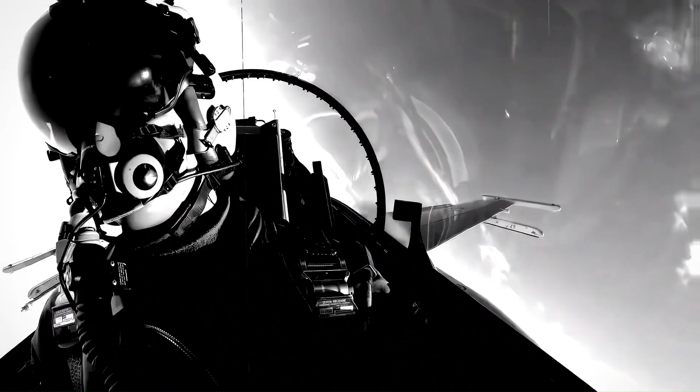The Lockheed F-16 Fighting Falcon. The F-16 was developed in the 1970s, during a period when CFD was becoming increasingly practical in aerospace design. As a result, the F-16 became one of the first fighter jets to significantly benefit from computational aerodynamic analysis.

Aerodynamics is the study of how air moves around objects, and for a fighter jet like the F-16, this directly affects factors such as lift, drag, stability, and maneuverability. Unlike commercial aircraft, which are designed to be naturally stable, the F-16 prioritizes, and I mean heavily prioritizes, agility.

This means they often fly at high angles of attack, where the aircraft's nose is pointed significantly above the direction of travel, as you could have seen in this image. At these angles, airflow can separate from the wing surface, leading to a loss of lift. The F-16 also operates near transonic speeds, where parts of the airflow locally exceed the speed of sound, forming shock waves that increase drag and reduce control effectiveness.

The effect of these shock waves can be said to be shocking. Sorry, I apologize. That was poor.

Designing an aircraft to perform well in these conditions required a deep understanding of complex airflow, an ideal application for CFD. I've said the term CFD a lot now, but what actually does CFD do? At its core, CFD predicts how fluids, such as air, move by solving the Navier-Stokes equations, a set of partial differential equations which express how the velocity, pressure, temperature, and density relate in a viscous moving fluid.

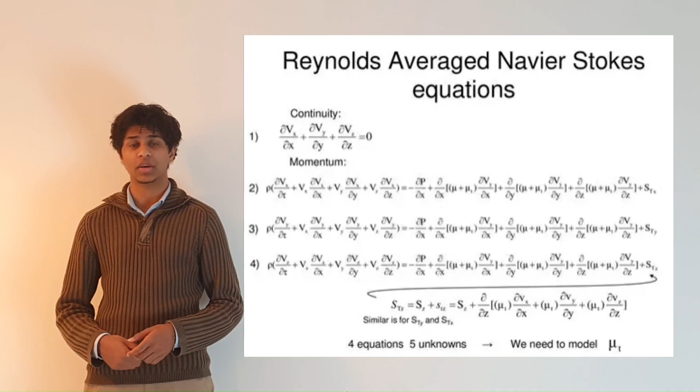So CFD usually solves the Reynolds-averaged Navier-Stokes equations, or RANS. RANS equations model the average effect of turbulence rather than every tiny fluctuation. To close these equations, turbulence models such as Spalart-Allmaras are used to estimate how turbulence affects the flow.

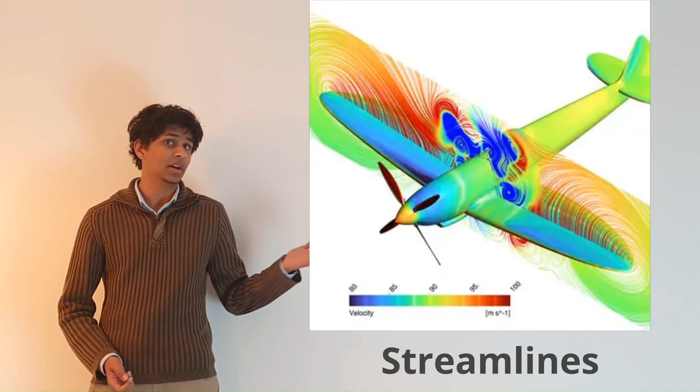Once the equations are set up for every cell, the computer solves them iteratively, repeatedly refining the solution over and over again until it converges. The final result provides detailed flow data for every cell, including pressure, velocity, and turbulence. These results are visualized using pressure contours, streamlines, and velocity maps, making complex airflow patterns easy to interpret. I say easy, but this still looks incredibly complex to me.

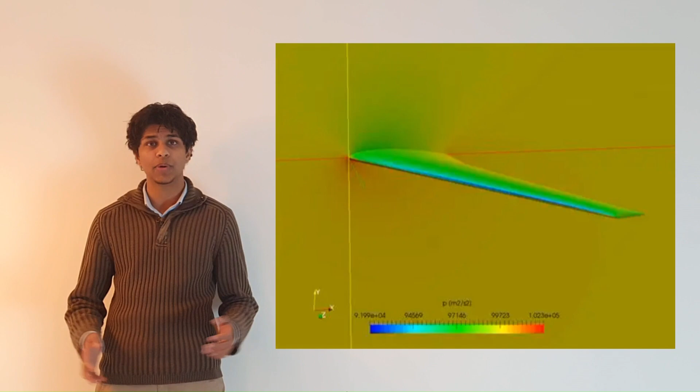One of the primary uses of CFD in the F-16's design was analyzing pressure distribution across the wings. CFD simulations allowed engineers to see exactly where low pressure regions formed on the upper wing surface, which are responsible for generating lift. By adjusting the wing geometry and leading edge shape in their designs, engineers were able to settle on a design which had strong lift even at high angles of attack. This directly improved the aircraft's turning performance and combat agility.

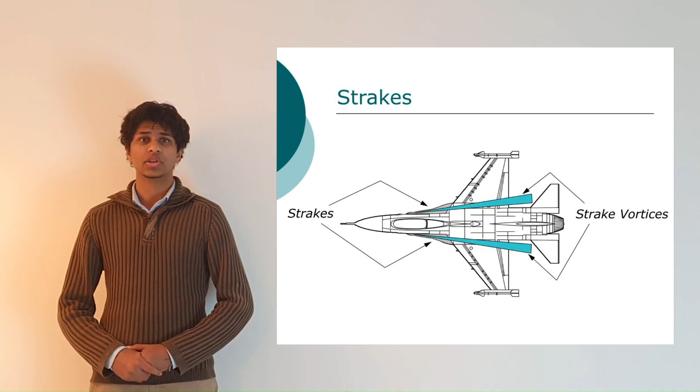CFD also helped identify regions where airflow separated early, allowing designers to modify the shape to delay the stall and improve controllability. One of the most distinctive aerodynamic features of the F-16 is its leading edge strakes, located near the wing roots. At high angles of attack, these strakes generate strong, swirling airflow structures called vortices. These vortices increase airspeed over the wings, reducing pressure and effectively increasing lift.

CFD allowed engineers to visualize these vortices in data, including their strength, position, and exactly where they broke down. Because of this, they were able to optimize the strake geometry, and engineers ensured that these vortices could remain stable over the wing for longer, improving lift and maintaining control during extreme maneuvers such as dogfighting.

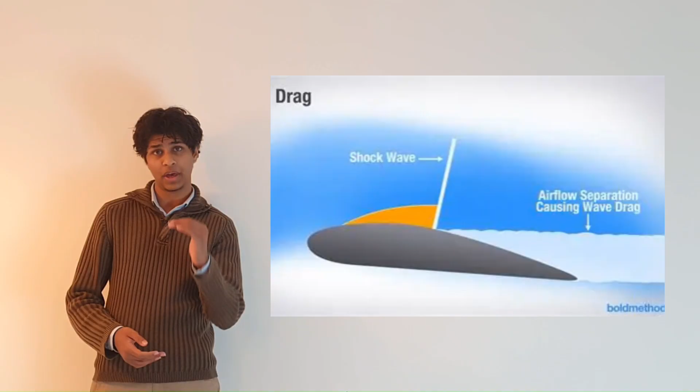CFD was also used to reduce drag, particularly at transonic speeds. Simulations revealed where shock waves formed on the wings and fuselage, and how they interacted with the boundary layer, the thin layer of air near the aircraft's surface. By refining the aircraft's shape, especially at the wing-fuselage junction, engineers reduced wave drag, improving acceleration, top speed, and fuel efficiency. Even small reductions in drag can significantly enhance a fighter jet's operational performance, so this was incredibly important for them.

The F-16 was additionally one of the first fighter jets designed with relaxed static stability, meaning it is naturally unstable in pitch, which you may think is a silly idea. This instability, however, improves maneuverability, but would be impossible for a human pilot to control directly. So, why did they do this?

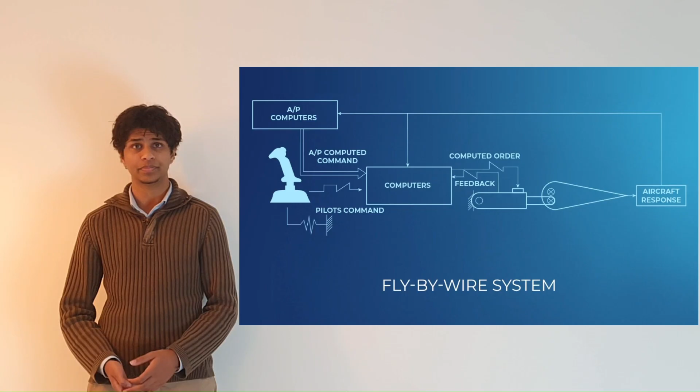Well, CFD was used to analyze how aerodynamic forces and moments changed with angle of attack and control surface deflection. This data was essential for designing the revolutionary F-16 fly-by-wire system, which automatically makes thousands of control corrections per second. The combination of CFD and digital control systems has allowed the F-16 to safely exploit its unstable but highly agile design.

So, in conclusion, computational fluid dynamics transformed how fighter jets like the F-16 were designed. By allowing engineers to visualize and optimize airflow in detail, CFD enabled performance improvements that would have been difficult or impossible using physical testing alone.

Today, CFD is even more advanced, using high-performance computing and artificial intelligence to design aircraft such as the F-35 and future sixth-generation fighters. The F-16 stands as a milestone in aerospace engineering, demonstrating how computational methods can directly shape real-world aircraft performance.